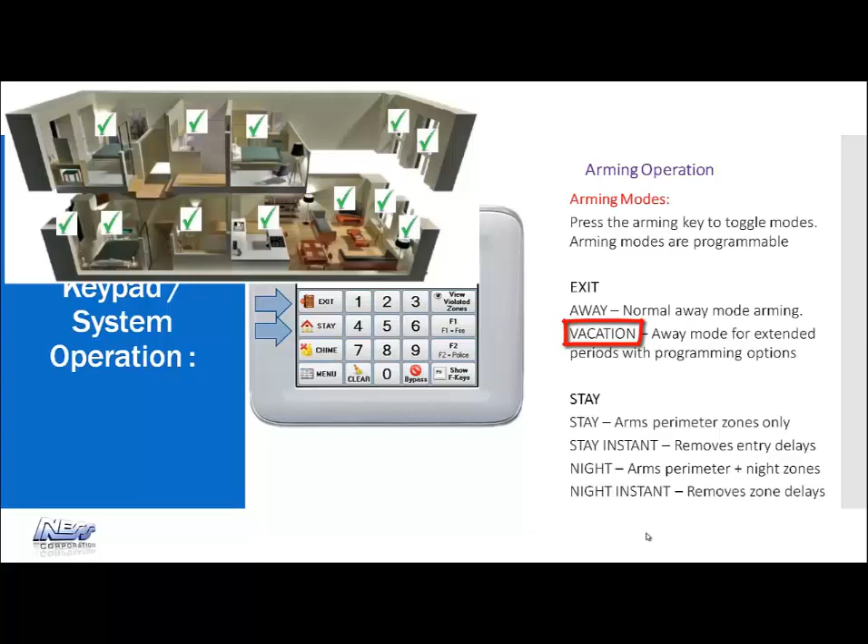So when we arm or disarm the system, in arm mode, we can arm it into two different modes: away mode or vacation mode. When we've armed it in away mode, every zone is armed that belongs to that area, and we disarm the same way. When we arm it in vacation mode, it still arms every zone the same as away mode, but via programming, we can add some more rules or features when armed in vacation mode. So as an example, when I'm leaving for work or the last person out, we can arm the panel, come home, disarm it, and we'd normally just arm it in away mode.

Maybe when you're going away for extended periods of time, on vacation, we can tell the M1 that when the panel is armed in vacation mode, do something special. For example, we might say when armed in vacation mode, turn lights on and off randomly at night time so it looks like somebody's home. It won't do that in normal away mode, but it could do it in vacation mode. You might also say when armed in vacation mode, activate some outputs to turn the fridge off because I don't want it running while I'm away. So just by arming vacation mode, bang, it will instantly do it. You don't have to do anything else.

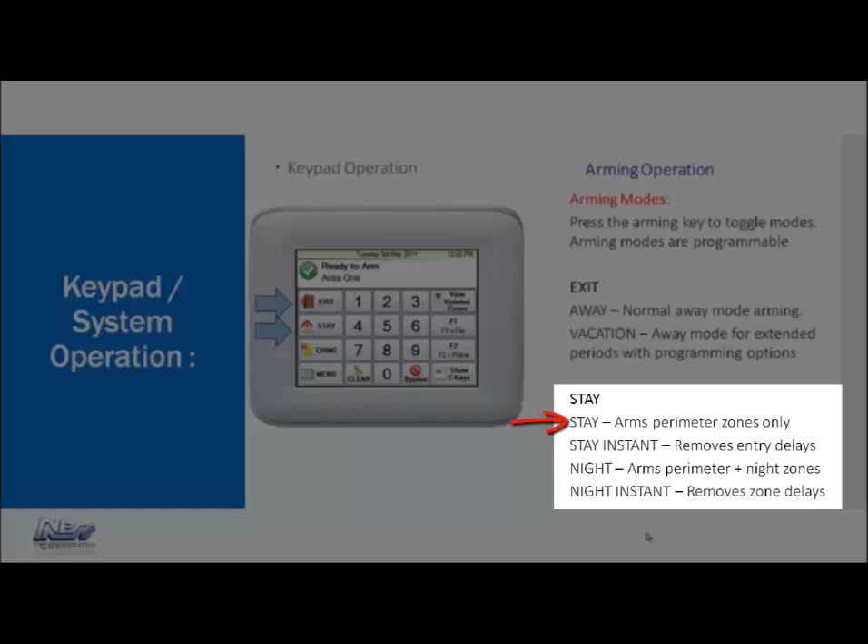When we arm in stay mode, there's 4 different functions. Stay is like we want to arm it - and it depends what school you went to, what terminology you want to use - stay mode, home mode, monitor mode are all various terms. So I want to arm it, but I'm staying home. I'm not going to leave, so I want to arm it and leave the perimeter on.

So we can arm it in a couple of different modes. Obviously armed away will arm all the zones. Stay mode as an example - let's look at just stay and night for the moment. Stay mode will arm perhaps the perimeter, all the doors and windows, but turn the PIRs off. So I'm downstairs watching TV, I've armed it into stay mode. I can freely move around inside the house. The PIRs aren't going to detect me because I'm home.

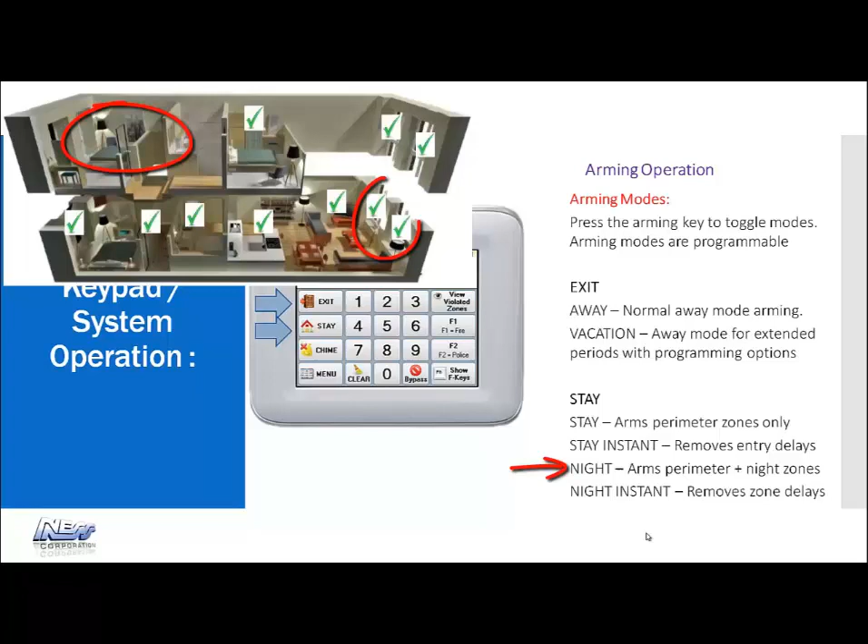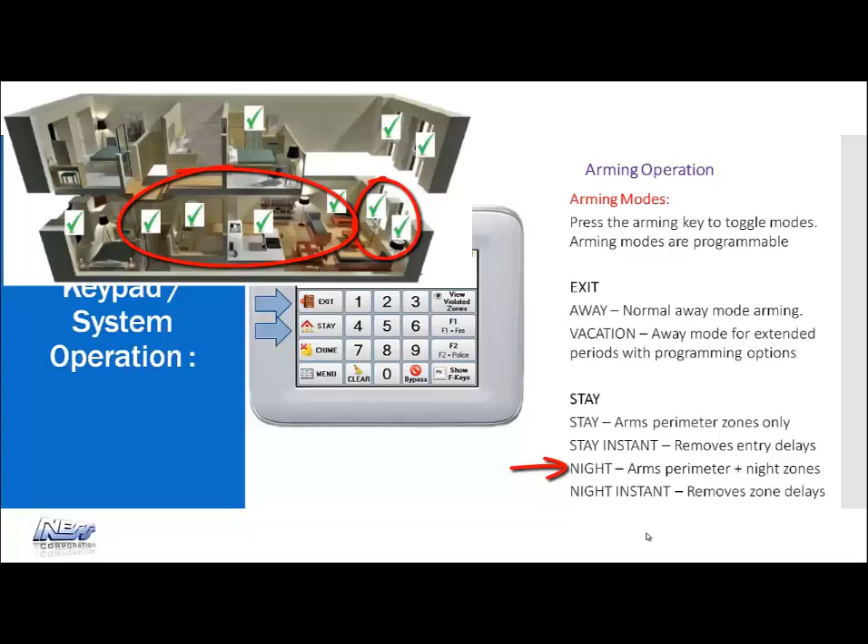I then want to go to bed, and I can arm it in night mode. So when I go to bed, perhaps upstairs, we arm night mode, which keeps the downstairs perimeter on, all the doors and windows on. But now, while still in night mode, we've got the downstairs PIRs turned on while I'm sleeping upstairs. So as well as the perimeter on, we've added another group of detectors, if you will.

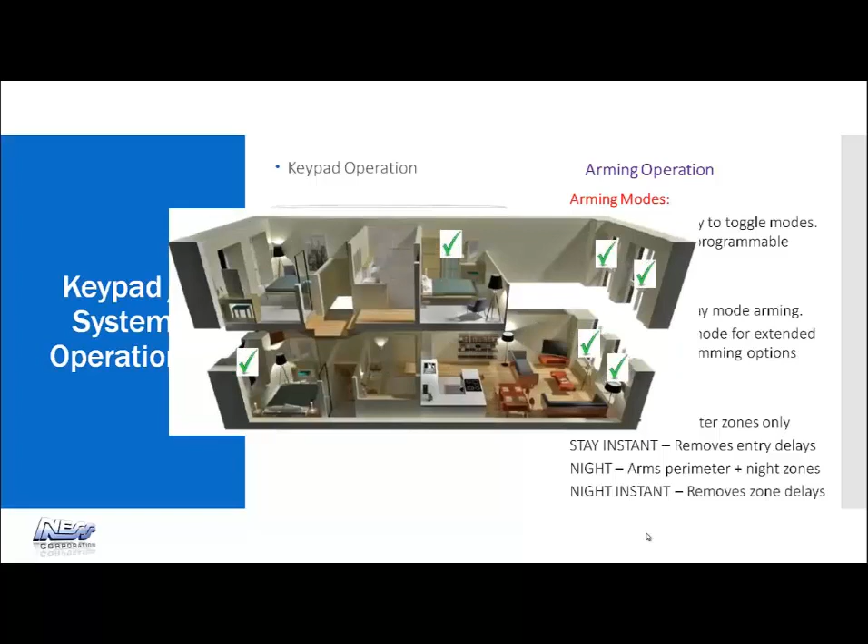So if we're looking at it, armed away is arming everything. Stay, we're just armed perhaps the perimeter. Night, we've armed the perimeter and added some PIRs. We've then got stay instant and night instant.

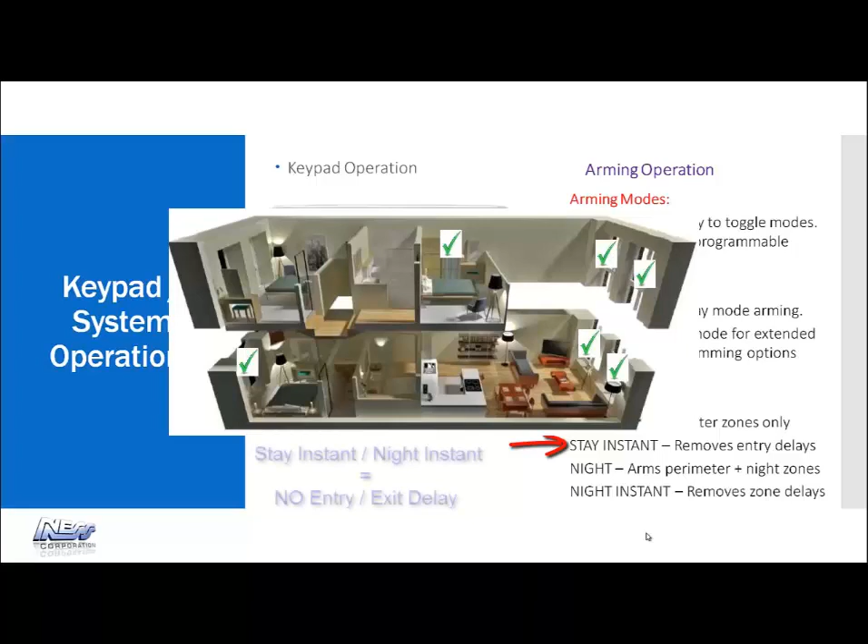When we're in stay mode and we've got the perimeter, PIRs, doors and windows on, your typical front door is still an entry-exit delay. Someone opens the front door, it gives you a delay time to get to the keypad to turn the system off. If we arm it in stay instant mode, that entry-exit zone - let's say typically your front door - becomes an instant zone. So as soon as we open the front door when armed stay instant, we no longer have a delay time, it will go into alarm straight away.

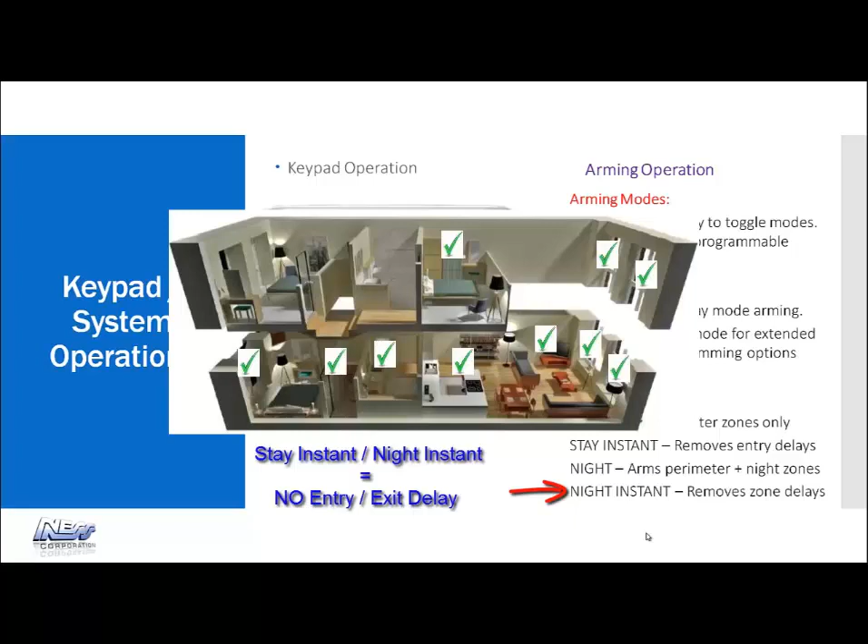The same if I was arming night instant. I've got night instant on, so I've got downstairs perimeter on, perhaps downstairs PIRs on now while I'm sleeping upstairs. Again, as soon as you open the front door, it's going to go off instantly, doesn't give us time to get to the keypad, which may be fine because we're already home. So that's where we can arm in night instant mode.

Okay, so those are the various modes. Arm away will arm everything. Vacation will arm everything, but can add some other functions to do things when we're armed. Stay mode will have perhaps the downstairs perimeter on, or the perimeter on. Stay instant will have the perimeter on, but the delay zones are now instant zones.

Night can have the perimeter on and downstairs PIRs, but we've still got a delay at the front door. And night instant has downstairs PIRs on, and don't get a delay on that front door.

Now, how we get arm into those various modes is we've got an exit button and a stay button. As default out of the factory, we do have quick arm, so I can just hit the exit button and it will automatically arm in away mode.

The problem with that, though, is when we want to force arm a zone, for example if I've got a PIR looking at the keypad, maybe the front door's armed when we're arming the system, it's very annoying if you had to tell the customer to stand still so the PIR that's looking at the keypad isn't detecting you while you hit the arm button. Because I want to force arm, because if there's a zone unsealed, even if it was programmed as a forced arm zone, when I hit exit, the system's going to tell me that we've got a forced arm zone that's unsealed at that time.

Are you sure you want to arm the panel? And if you say yes, I'm sure, it will say, well, enter your PIN code to verify that you really want to arm it. So if you've got to then add a PIN code, my recommendation is to disable the quick arm, disable that exit button quick arm, and just enter your code to arm anyway.

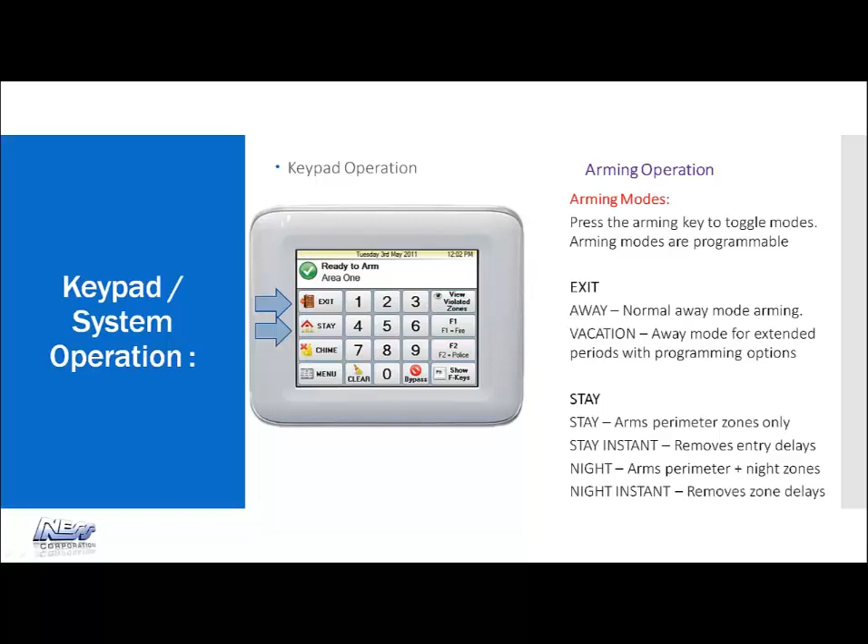To disarm the system, you always have to enter a code, whether it be set for a 4-digit or 6-digit code. So the system will be armed. When you come into the premises, you have to enter your valid 4-digit or 6-digit code, depending on how the system's set up.

To arm the system or disarm, you've got up the top line the status, and that can either be ready to arm. So ready to arm, it's showing here area 1, but you can name that area to be office area, main home, whatever you want to call it. It can be force ready.

In other words, it's ready to arm, but there's a zone that's unsealed. Perhaps the PIR looking at the keypad is looking at it and it's not ready. It's ready to arm, we're going to force arm.

We can also come up not ready, meaning that if there's perhaps a back door, back window that's open, a warehouse roller door that's still open, that's not allowing you to arm the system, you've got to close that first. That will then cause the system not to be armed.

If not ready is visible and the customer still tries to arm the system, and of course they never look at that and they just arm the system 1, 2, 3, 4, the system will then give a long beep, and then via the internal speakers it will tell you the zone that's not ready.

It'll say, for example, the name, it might say zone 10 if you've left it as default, or it might say back door is violated, please close door before arming. So you go back and shut the door, put your code in again to arm it.

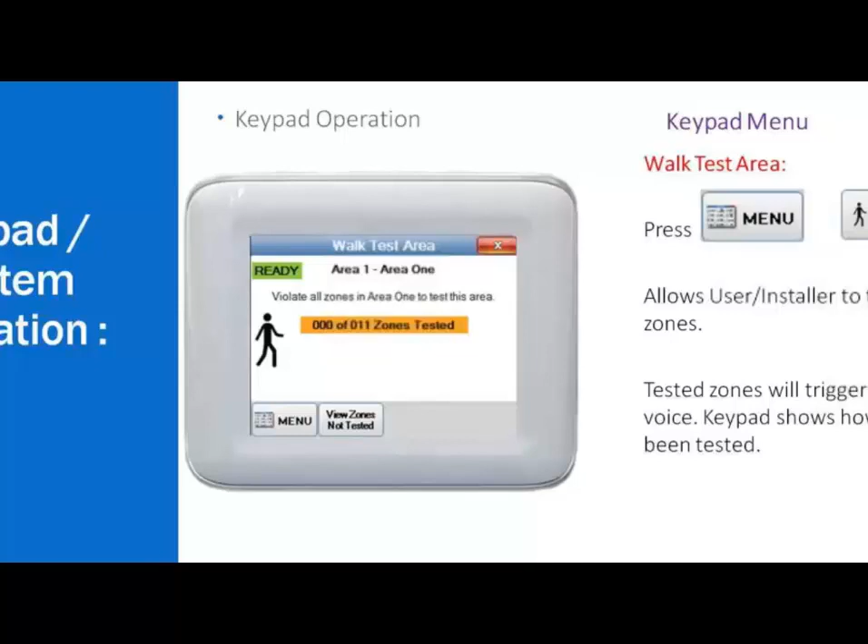When we come back, if there's only 10 of 11 tested, and you think, well sure, I tested them all, you can click on view zones not tested. So when I click on there, it might say zone 1 not tested, or zone 10 not tested, whatever zone it was. From there, I might realize that's a reed switch on the manhole. So then you know that hasn't been tested, or that we didn't open the back window, we didn't test that.

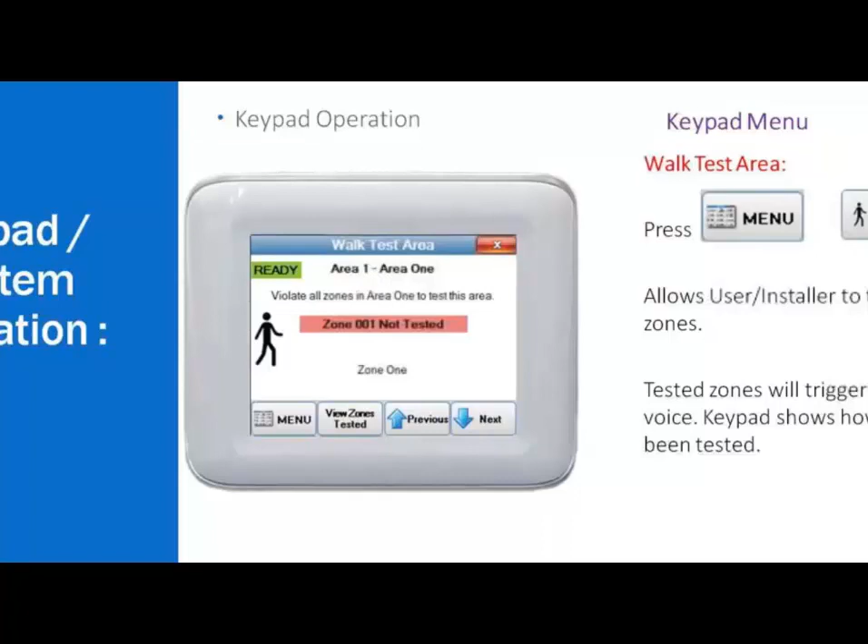It's a nice quick way - you don't have to arm the system and have sirens activating. When you normally tell the end user they should test the system every month, the testing would be they arm the system, wait near the front door, open it, hear the entry beeps, wait for the siren to ring for a couple seconds, disarm the system and say yep, my whole system is working. This way, they walk test and actually test every zone on the system without having all the sirens ringing. It's a lot better, more secure way, and it logs when they did the test.

The other common question asked is, I want to use the one keypad and arm every area in the system. This is obviously when it's split up - it could be a basic system like a house and a garage, house is area 1, garage is area 2. Or it might be a hotel where the bottle shop is area 1, the kitchen is area 2, the warehouse is area 3, the office area upstairs is area 4, the dining area is area 5 - multiple areas on a premises.

So what you can do to arm other areas from the one keypad - on the Navigator keypad it's a lot easier. We've added a button called Select Area, so it says, look, I want to arm that particular area there. When we go select areas, I can do it two different ways. The easiest way brings up a list of all the areas - click on the bottom button that says control all areas.